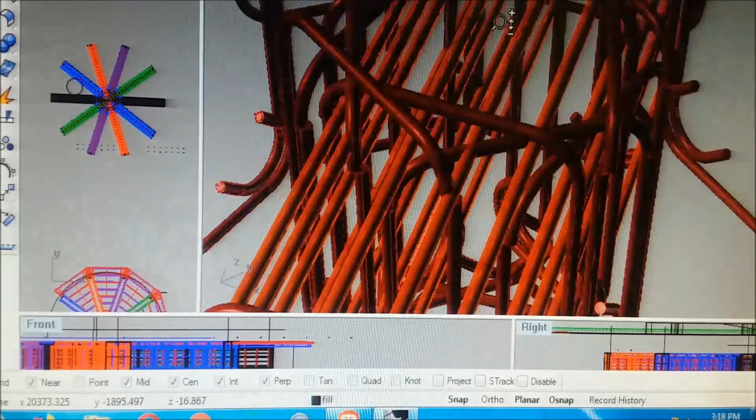Okay, let's back up a little bit on this. Oh, my mouse doesn't work. Well, this will work.

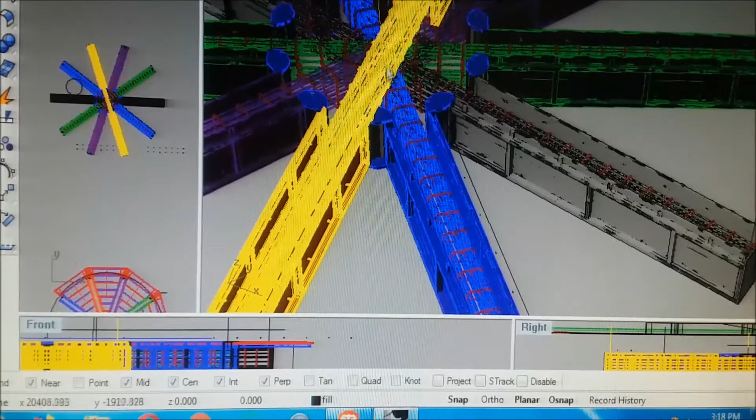Okay, this is actually showing a little bit more than what we wanted to get into right now. But we were looking at this in the center in here, and there is no yellow. We were looking at this purple with the other colors, and how one sits above the other all the way across, and the beam goes clear to the end out here to the end cap on the forms.

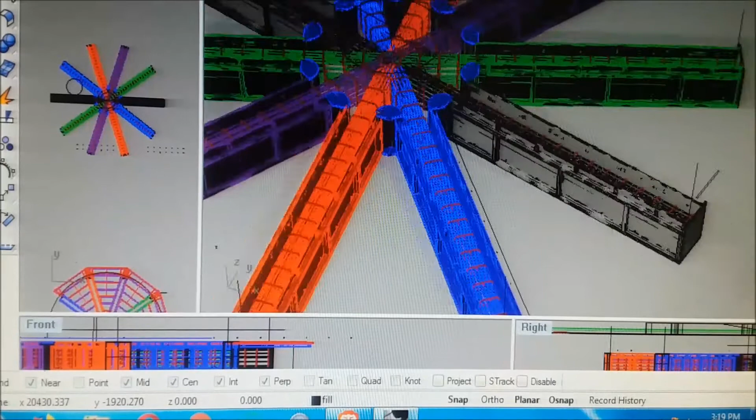This is also showing the forms. Let's see if we can - something's gone wrong with the mouse. It's not like I had this thing seriously rendered or anything.

We had some experienced lumber that was a little more than 2 feet. So we made a top and a bottom with these 2 straight edges at the angle of the forms in the spoke. And then we wrapped 2 mil galvanized metal around this to give a real smooth curve.

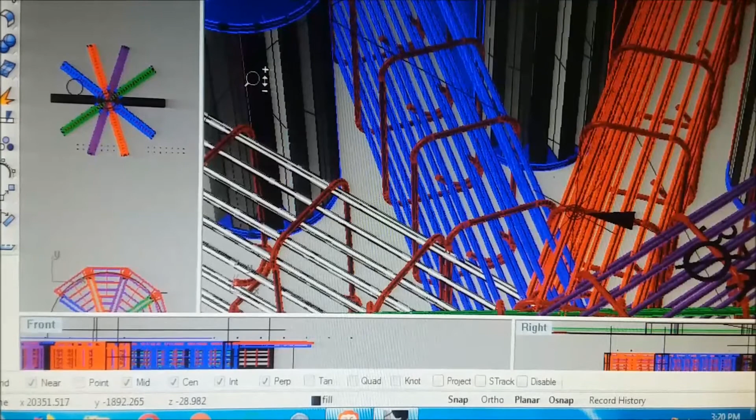And you can tell on the slideshows and some of the walk around videos that all we did when we were done was put some skim coat on them. Didn't need anything else.

Okay, we're looking at a form here, and you'll notice that the plywood for the form is 24 inches high. It's half a sheet. And you notice it's exactly the same height as this here. All of it's the same.

But it's set down with a spacer here for a piece of 2x3 cocoa lumber. This was just a test gauge that we went by when we screwed the stuff together. And what that does is it leaves you a ledge on the forms.

After you pour the beams, the concrete goes between this vertical wall, that vertical wall, and around the galvanized metal. Took 84 bags of cement, 2 times that in sand, and 3 times that in gravel. Did it in a day. Kind of afraid not to have done it in a day on this.

I really don't want to not do a floor in a day, and I didn't want to not do this in a day.

But anyway, you pour all the concrete in there, and then you have to put a floor to cap this thing off. And we didn't have any additional supports or anything, only cocoa lumber running across from one - like here, you see the red ones right there, would be a piece, half a meter would get that, and then they were just longer.

And that let us lay phenolic board in this height difference between this 2x3 and the top of the form. So the 2x3 stock doesn't come all the way up. That leaves you room for your 3/4 phenolic board to fill in these wedges. And then we just poured the roof.

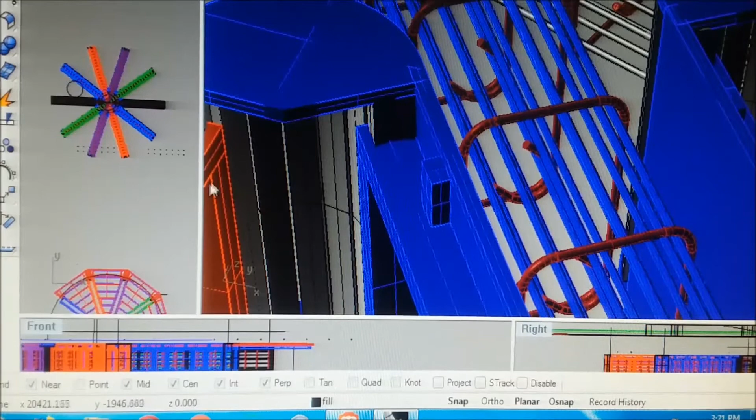This is looking down on it, and I think this has also got the forms in it. You can see where we poured the concrete around here, and these things butted up, and they had some 3-inch T25 screws, about 3 or 4 of them into this on both sides.

That keeps the walls plumb and keeps the joints from coming apart. Also, we have 4-inch plastic pipes. The ones you see out here didn't come up to the top of the concrete, they came up a half a meter. Being that you got a 24-inch thick beam and an 8-inch thick floor, that's 32 inches. But these outer 10, one for each intersection, that's to put can lights in from underneath. There's 96 lights in this house, and that's just one of them.

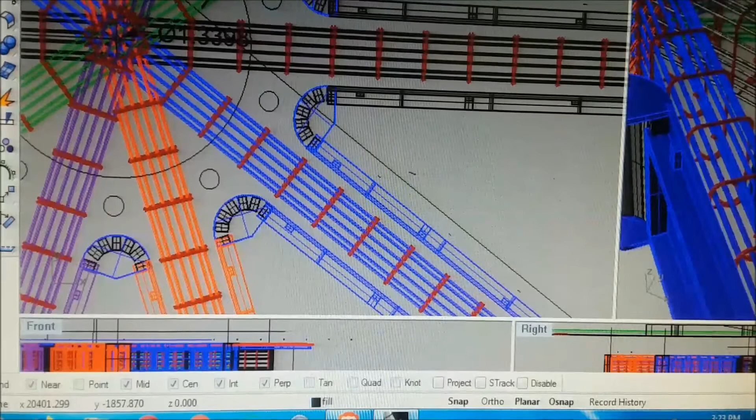If we get over here, we should be able to find you some other pipes here. I know there's 3 of them. There's one right here, it should be on this drawing. Of course, this drawing might be an earlier drawing - might have saved it so I couldn't lose it and then added to it. But what these are, also 4-inch pipes. This one's a 3, it does something different, but it would be a 4. There'd be one here, and there's one over here.

And all the wiring that goes to the can lights and out to ceiling lights and air intake by the seagull grills - there's lights out there, lights on the roof, and lights in the rooms, the individual things that look like rooms. The upstairs is not rooms. The upstairs is a controlled flow path for air.

It's a duct, it just ends up tall enough. We changed the height - we originally designed it to be 4.5 feet. But once we got a 2-foot beam drawn in, it looked odd, the walls looked too short. And the forms we've been using, the bottom section was 8 feet tall, so we just poured them 8 feet tall. Didn't have to do any different form work, just had to pour them. So that's what we did.

When we used them downstairs, there was a 2-foot section that bolts up to the top of it and offsets by 3.5 inches. That's how we'd pour the top beam and the wall on the same pour. So it's basically one very deep beam running post to post, or you can think of it as a column between 2 other columns. But it's solid concrete, and rebar is in it just like it was poured as a beam.

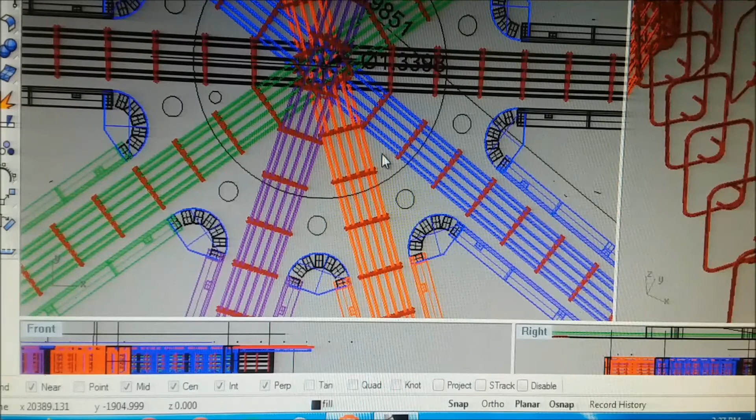I don't know if there's anything else to talk about on this. We might just... this mouse needs a new gizmo.

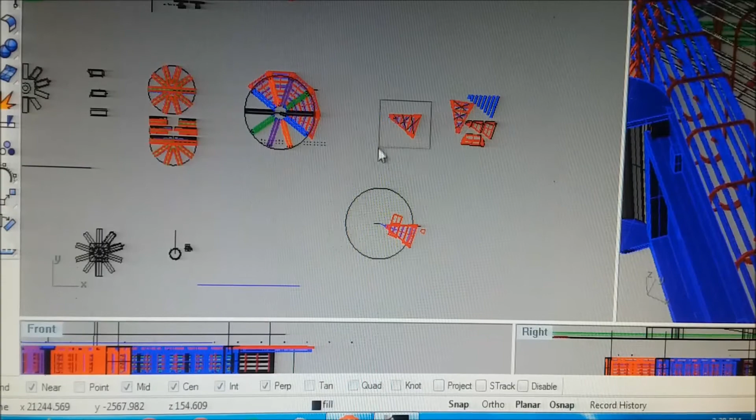This is what one of the pie-shaped forms looks like. These are the little pieces that go across the wall forms from the spokes. The black lines just show there's a panel, they're not a part. The red lines are the phenolic board. There's 2 4x8 sheets here, and the corner cut off here went over there, and the corner cut off here went over there. Then there's a sheet just chopped up willy-nilly to make these couple pieces.

There's 3 pieces actually for that, and they have to end up where you can put the seams together over top of these cross pieces. So the cross pieces aren't necessarily exactly 2 feet by 2 feet on center - they're wherever it had to be for it to work out.

So we just cut them an inch longer than the drawing, put the phenolic board, set it on top, marked where to whack it, and put it in the miter saw. They all fit pretty good. All the screws had to be put in before we put the phenolic board on from underneath, the reason being you have to get under there to take the forms back apart.

And these side forms - 5 of those turned into the side pieces for our construction stairs. We had to replace the coco lumber stairs with this, which is Narra. When you order hardwood, you don't know what you're going to get - sometimes you get Narra, sometimes you get mahogany.

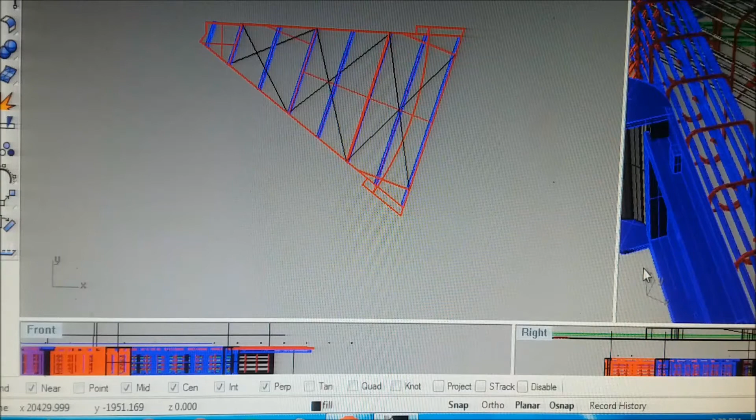Well, that was a mistake. View, set view, top. You can spin any of these around in perspective, any viewport.

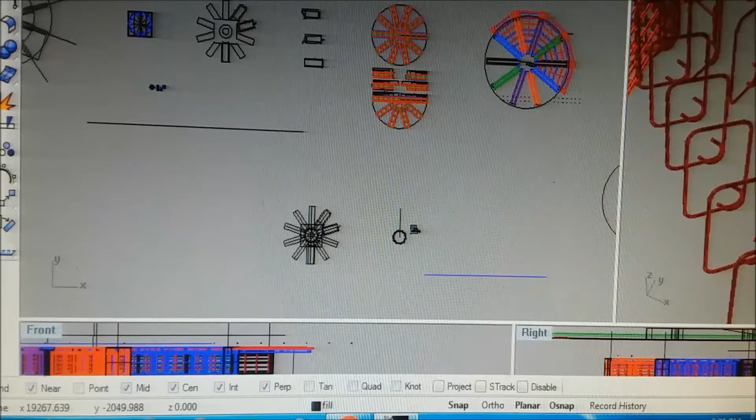This is something that's not real terribly obvious. The one on the left shows how those things fit onto a 2 4x8 sheets. Because these plastic pipes that are going to mount the fan are stuck in these phenolic boards, and then they go up through the top, and we just tied them off where it seemed to be plumb. But we needed to know where they were at the bottom, so we saved these 2 pieces of phenolic board, and then we just flipped them over.

When you drill them, it splinters a little bit on the bottom side, so we knew which was the bottom, and we could tell from the holes which was left and which was right. Basically, if you know the top and the bottom, you can't put it together wrong. That let us build that ring frame that bolts up here, and it'll be a perfect fit.

Over here on the other side of this is 2 4-foot sheets, and they were spaced up on something that looked like a ladder on either side - just some spare coco lumber to give it the right height, because there was a floor underneath all this that we were walking on while building it, since we had decked the whole thing to pour the donut floor around the outside.

And there's stands for the first floor, and they sit on a piece of 2x3 spacer block. So you pry them up and knock the blocks out, and the stands come right out to use them again, so you don't have to beat on them.

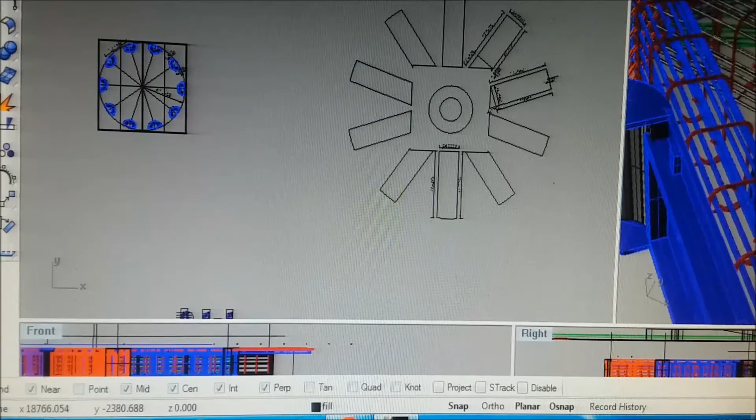This is just showing those pieces. These are the ones with a notch and one halfway between, and these are just bevel cut. They're showing what they look like.

The skinny thing going on here is the actual spider beam. It doesn't go to the edge of the roof by about 6 or 8 inches, because there's electrical boxes and a light there, and it just keeps the rain off of it.

I think this floor is 32 feet. Well, it's 395 inches. Is that 32 feet? I don't know.

And the length of the spider beam, each beam, is 376.25 inches. Of course, you can make this any size you want.

This could be a beach house with the ends out here sitting on posts and glass walls all the way around. And then this is just an architectural feature in the middle of the room with a big fan on it.

It's the focal point of that round living room. Every room's got to have a focal point. The stairs room's got the helical stairs, the kitchen's got the counter. This room has got the fan and this spider beam. There's a focal point in every room in the house, but we need not go into that right now.

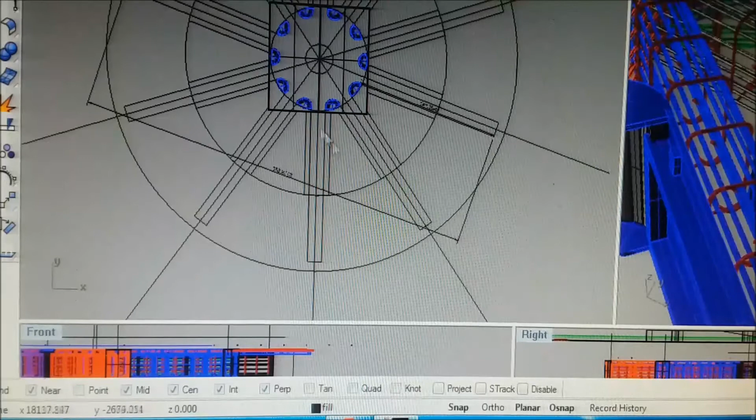This scroll wheel is worn out.

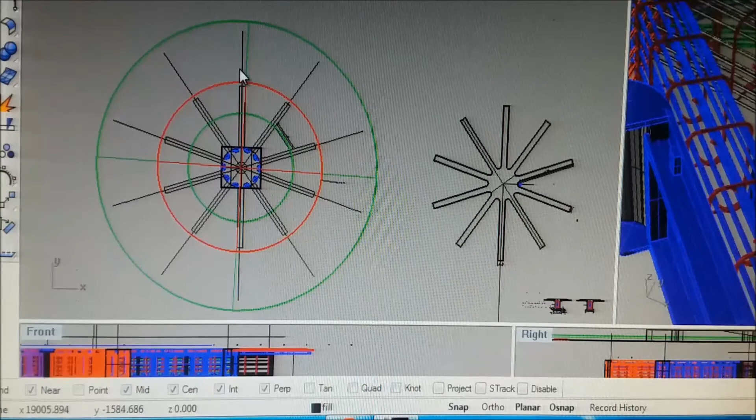I was hoping I had something showing where the actual beams are, but I don't, not in this drawing anyway. I had the dimensions of the beams.

The beam would be here, it's outside of this. This is our clear line, so the beam is here. It's like 20 inches front to back and 32 inches side to side.

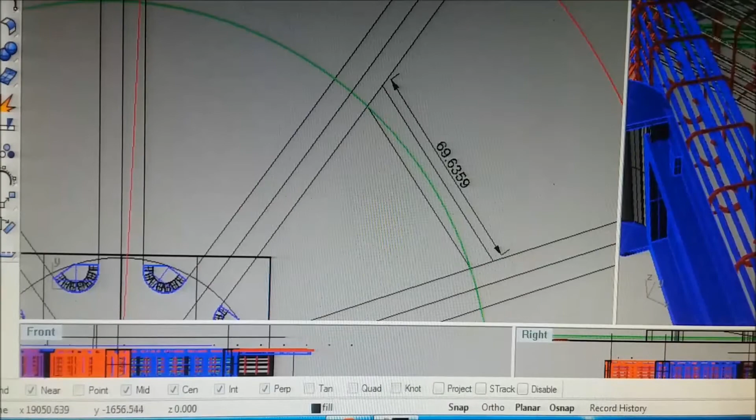It's actually all four of the forms that we did the outside posts with, inside post downstairs, but they're put together differently. We took the two narrow ones and put the wide ones on either side of them hanging over, and made a different shaped rectangle out of the same forms. So that let us use those a few more times.

We're changing over to slip forms now due to watching a video by Texas Filipino. All my little stuff outside is going to be slip form.

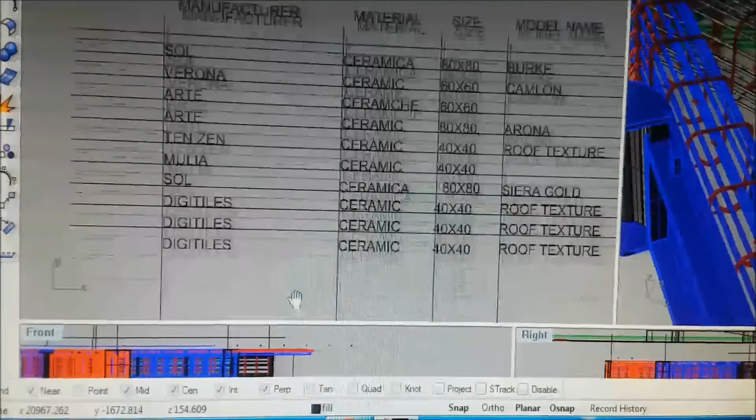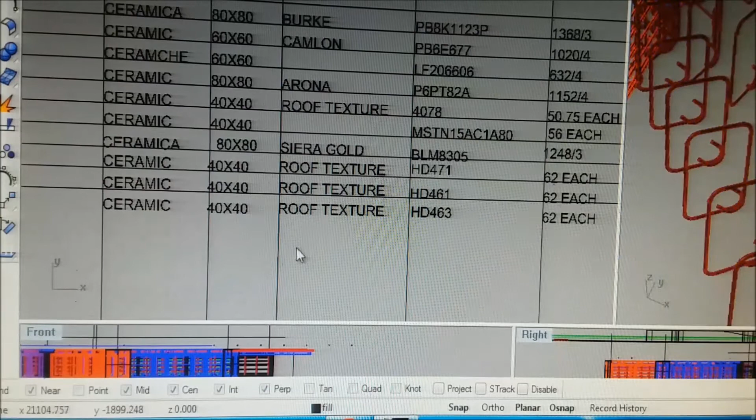Oh, this is our first run through on ceramic tile. Manufacturer, the material, size in millimeters, model name.

Some of them have model names and some of them are textured. Product code and price. And the reason we needed to know that is because we're going to cover this roof up here with ceramic tile, just like you would a kitchen floor, and also the ring roof with the atrium.

Or the lanais, got 5 lanais around here. Every other one's got a lanai. So we're going to put ceramic tile up there.

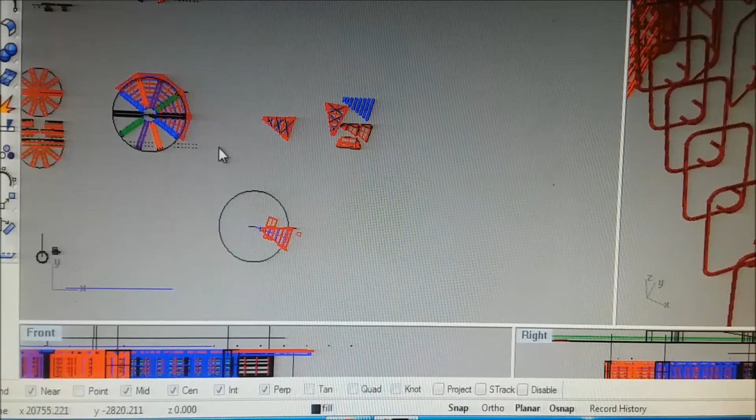That way those hairline cracks you get when you pour concrete in the sun and high wind, and you can't keep it wet or won't keep it wet, they get these hairline cracks and water can get down through there. So we're just going to seal it off from the top with ceramic tile, and the bottom is already sealed off with skim coat. So that's the plan on that.

There's nothing else of interest here.

Okay, so we're going to stop this video, and then we're going to do one on the stages of slip form construction, how you would actually build a house with that, whatever height walls you wanted, poured in sections.

You can pour pretty much back-to-back days. If you have your forms bolted up, you can take them off in the morning, slide them up, clean them, and throw some WD-40 or Pam cooking spray or something on them for release. Pick them up and put the bolts back in, and that afternoon you can pour it again.

And then the next morning you can pour the, if it's 3 lifts, you do the 3rd lift, and you would stop at a door frame, end of a wall. I got a video with dimensions that we're using on our slip forms, and it shows you how to make a 90-degree corner that all bolts together. If you take 2 of the inside corners and put them against the 8-foot long outside one, you got a T intersection for a wall. I didn't bother to put that on the video, but I knew it could do that.

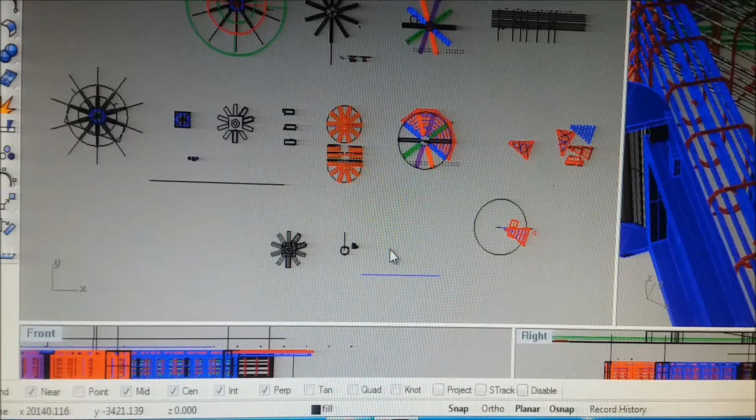But the other thing is we wanted to make a nice 90-degree intersection, because the advantage to the slip forms is you haven't got to have posts or beams other than the tie beam under the ground for your major floor, the grade level slab. You have tie beams down there to set all the weight on, but you don't need columns. The intersections are continuous around the corners and things. Just a wall with a bend in it. And it's poured concrete just like your column would be.

And why would you put a beam on top of a poured concrete wall that's already got rebar all through it? Just take a spray can and put a line across there and write beam above it somewhere on the wall. Call that the beam. You don't really need a beam.

They're just like that with the stirrups. Everything we did looks like it's a separate beam, but it's not. If we had got to a situation where we couldn't mix enough concrete in a day to do what we wanted to do, we could stop at the top of the wall, 2 inches below the beam, and then pour the rest of it tomorrow. Would have made no difference, because the rebar for the wall runs up through

this another 2 feet out the top of the beam, and they get bent over into the floor. So when you're pouring these outer walls and you haven't put your floor up there yet, then you got these over 2 feet of beam sticking up, and there's a thing on our stirrup building that shows how many vertical bars there are in this house. But we saved 6 of them to put additional height on something if we needed it. And now that we've gone with the ornamental iron, we don't need it. But all the rest of them are bent over into the floor.